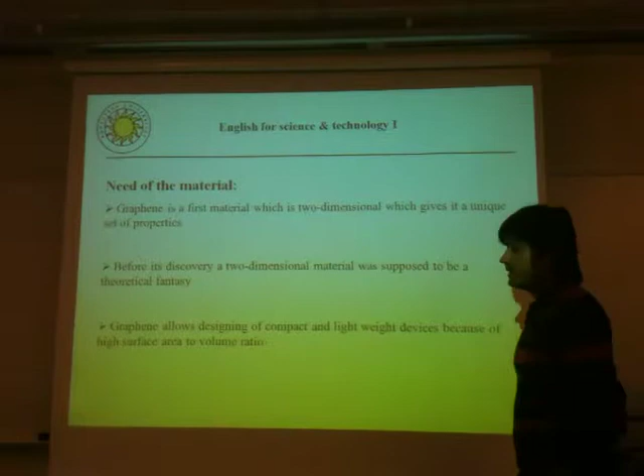Next we move on to see the need for the material. Almost all new discoveries in science and technology are based upon materials.

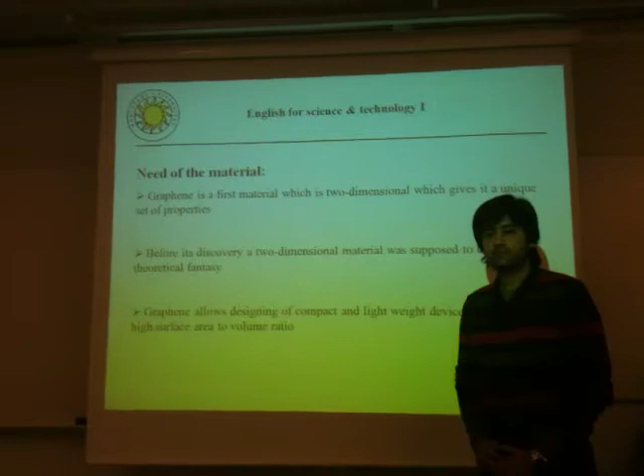The development of new materials can lead to the uncovering of entirely new fields of research. Essentially, this also leads to new solutions to problems that may have been thought impossible to decipher in years gone by.

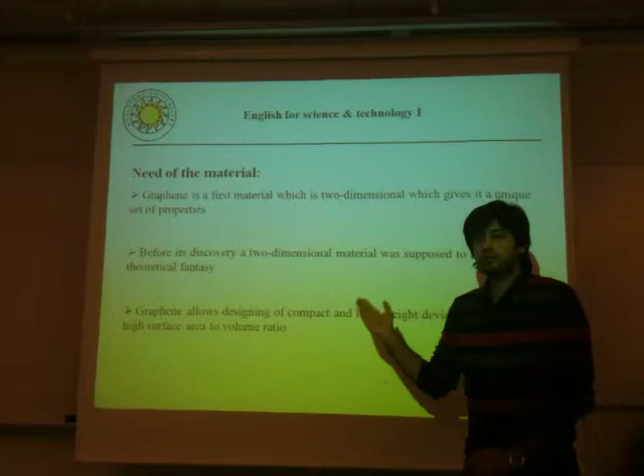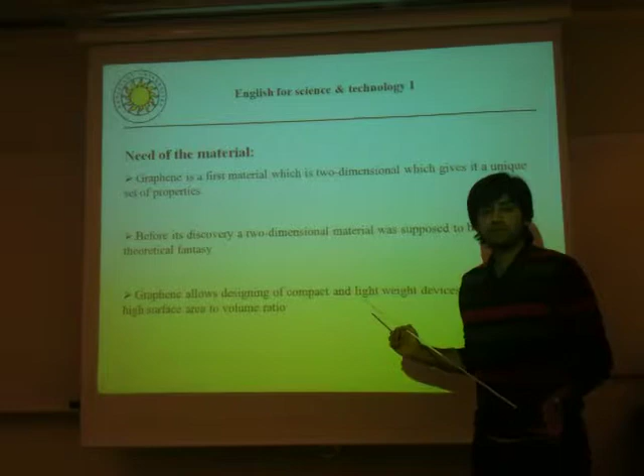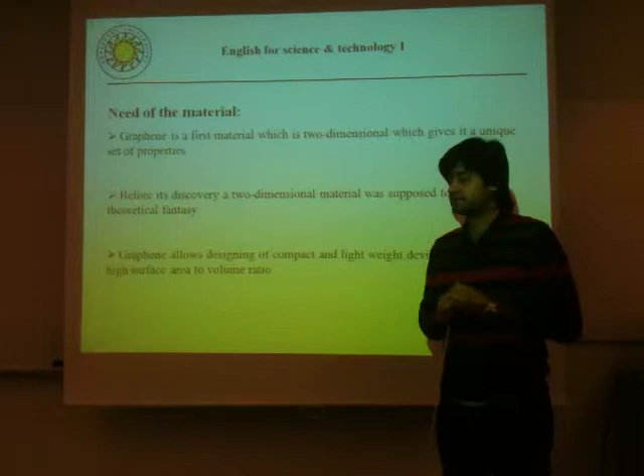Before the discovery of graphene, a two-dimensional material was supposed to be a theoretical fantasy. Graphene allows the design of compact and lightweight devices because of its high surface area to volume ratio. It has extraordinary thermal, electrical and mechanical properties and has relatively low cost compared to other materials.

Many scientists were looking for graphene using complex experiments, but the first crystals of graphene were discovered in 2004 using an effective method, namely an ordinary Scotch tape.

During one of the experiments in Manchester, the scientists Andre Geim and Konstantin Novoselov noticed small parts of graphene on tape which was used to clean a graphite stone.

Both scientists were awarded the Nobel Prize in 2010 in Sweden for the discovery of graphene. Thus, the Scotch tape method made it possible to obtain and study monolayers of graphene.

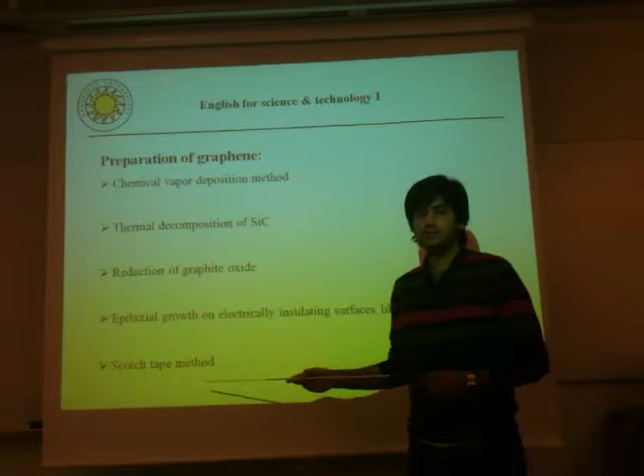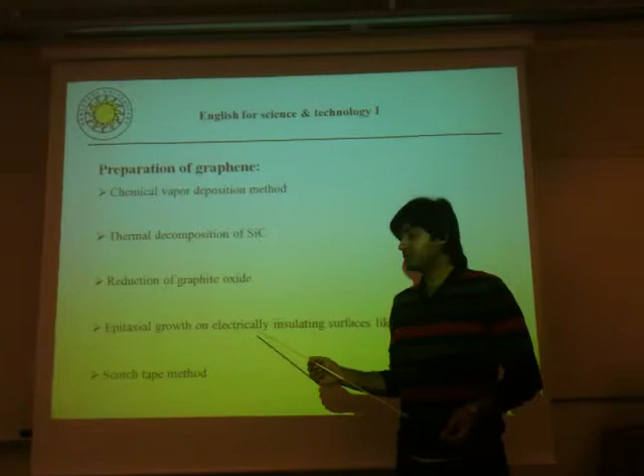Next we move on to see how graphene can be prepared. Graphene can be prepared, obviously, in the one mainly used method which led to its discovery, the Scotch tape method. Other methods include chemical vapor deposition, thermal decomposition of silicon carbide, reduction of graphite oxide, and epitaxial growth on electrically insulating surfaces like silicon carbide.

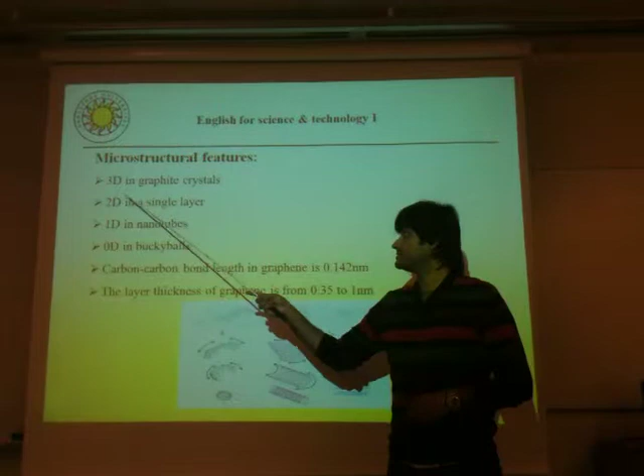Microstructural features: the microstructural features of graphene in different structures are three-dimensional in graphite crystals, two-dimensional in a single layer, one-dimensional in nanotubes, and zero-dimensional in buckyballs.

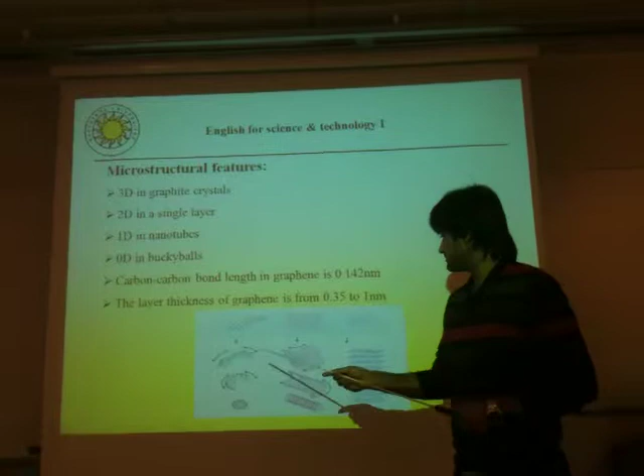This figure represents different structures: buckyballs, nanotubes, and graphite crystals. Graphene is zero-dimensional in buckyballs, one-dimensional in nanotubes, and three-dimensional in graphite crystals. The carbon-carbon bond length in graphene is 0.142 nanometer, and the layer thickness of graphene is from 0.35 to 1 nanometer.

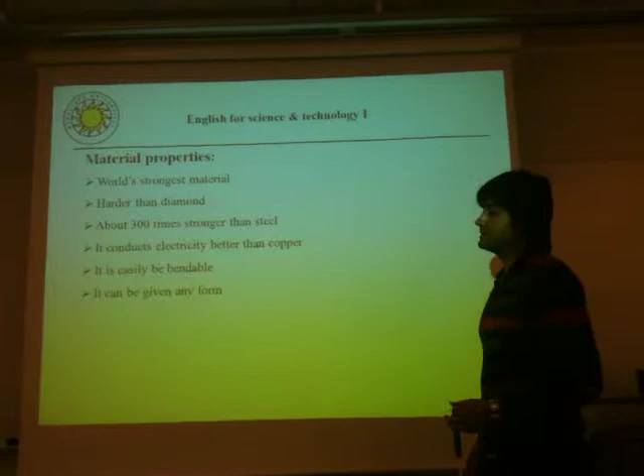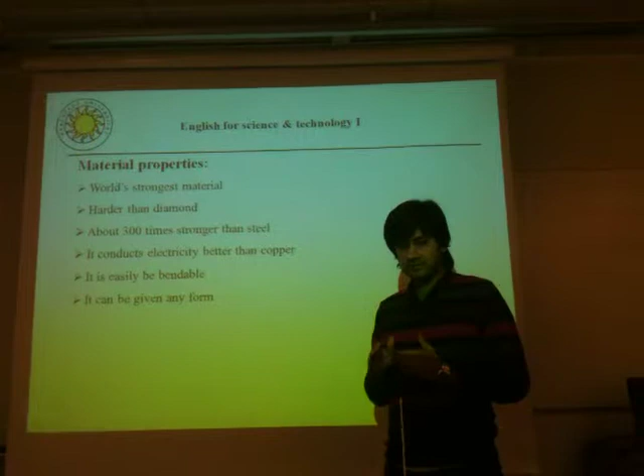Next we move on to see the material properties. As discussed earlier, it is the world's strongest material, about 300 times stronger than steel, and harder than diamond. It is a transparent material which conducts electricity much better than copper, and it is easily bendable and can be given any form.

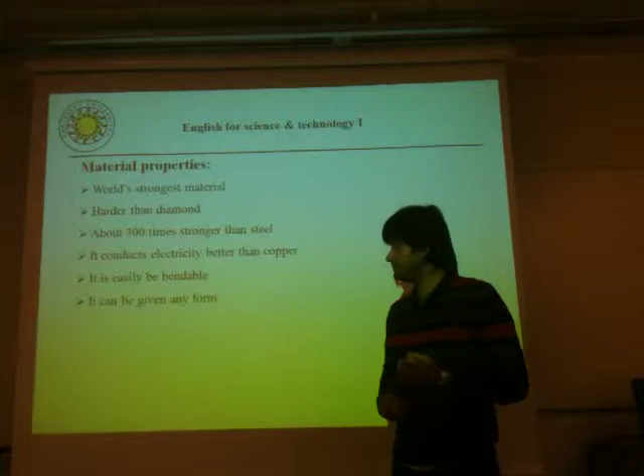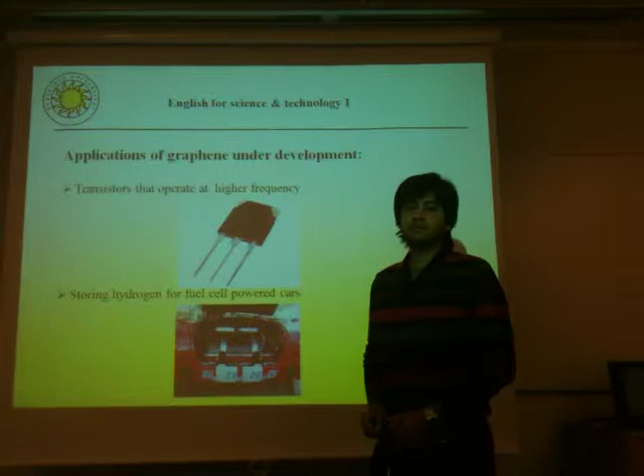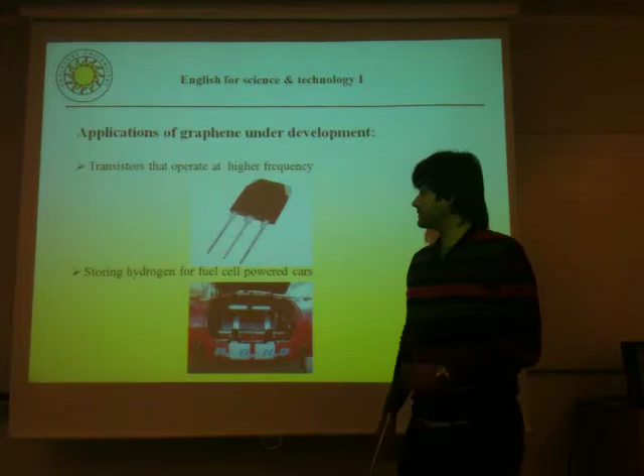A high frequency transistor can be built with graphene because electrons move at higher speed in graphene than in silicon. There is one more application of graphene still under development: storing hydrogen for fuel cell powered cars.

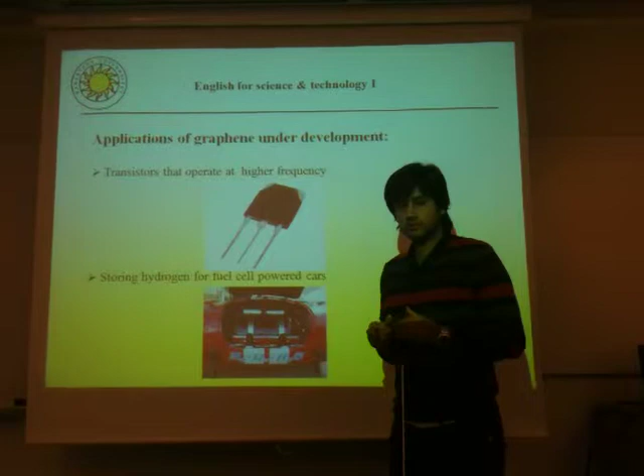A fuel tank made of graphene material allows a larger quantity of hydrogen to be stored in it because of the increased binding energy, as well as the lighter weight of the fuel tank. This could help in the development of practical hydrogen fueled cars.

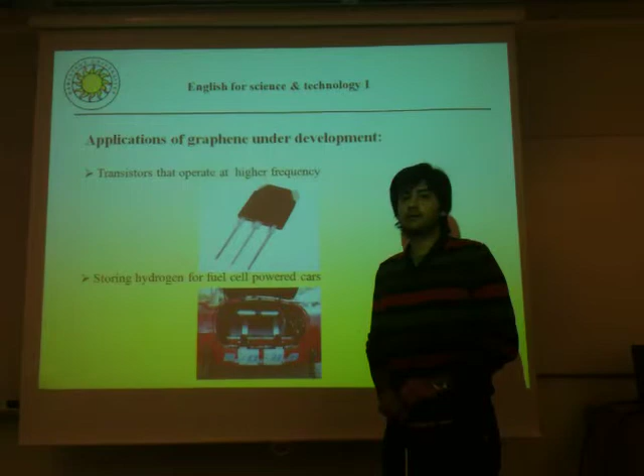This is all about the material graphene, and thanks for your attention.